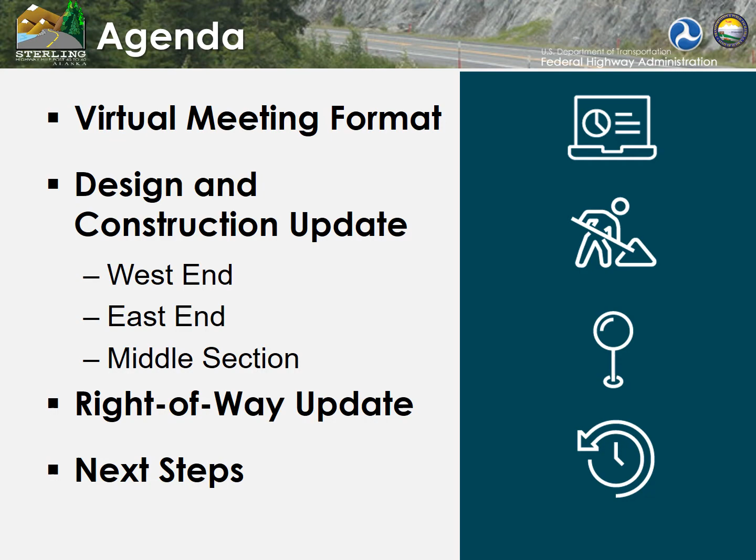We're using a virtual meeting format, which consists of an online open house supplemented with several different ways that you can get in touch with us. I'm also going to cover a construction and design update on the different segments of the process.

For this outreach opportunity, we are hosting a virtual online open house from October 22nd to November 5th. So if you are watching this presentation on our website, you have found it. There are a few other opportunities to interact with the project team that you might want to consider.

On Tuesday, October 27th, from 4:30 to 6:30, we'll be hosting a live online chat. During that time, you can visit our project website, and there will be a chat bubble that will pop up on the right hand of the screen, and you can chat online with members from the project team. We'll have representatives from all the different areas of expertise on the project to answer your questions in real time.

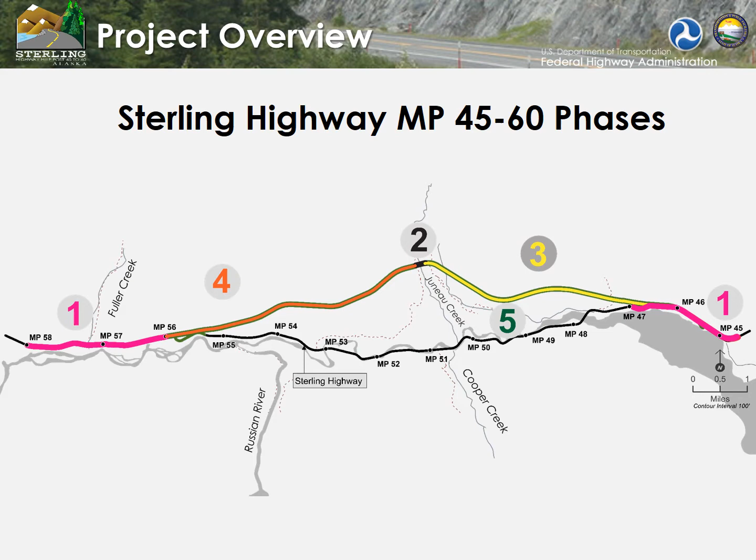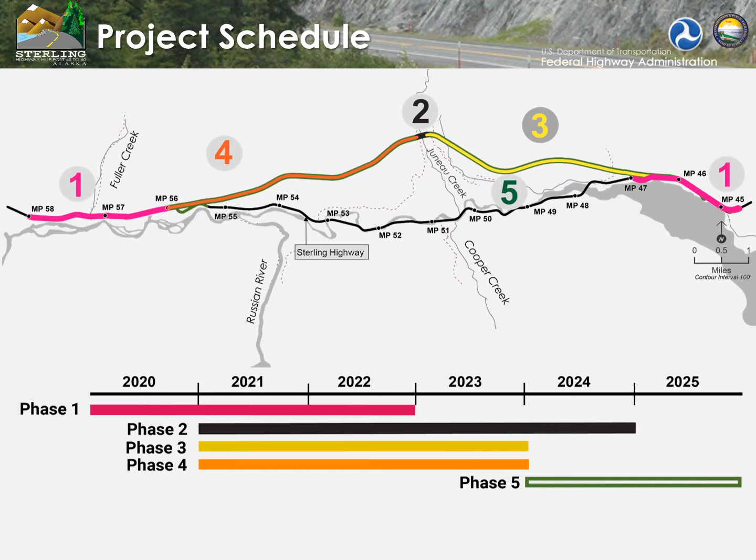Next year, construction will start on phase 2, the bridge. That construction is estimated to last 4 seasons. It is the most complex portion of this project. The east alignment and west alignment, phases 3 and 4, will continue construction next summer, and the final completion will happen by 2025. We still have a goal of being open to traffic by the end of 2025.

This segment of the presentation covers design and construction updates. If you're looking for an overview of the entire project, you can view the video on the online open house homepage. What I'm going to cover today is really highlights of new items and minor changes. If you'd like an in-depth overview of what's planned for the east and west ends, please take a look at our presentation from February 2020, which is also archived on our project website.

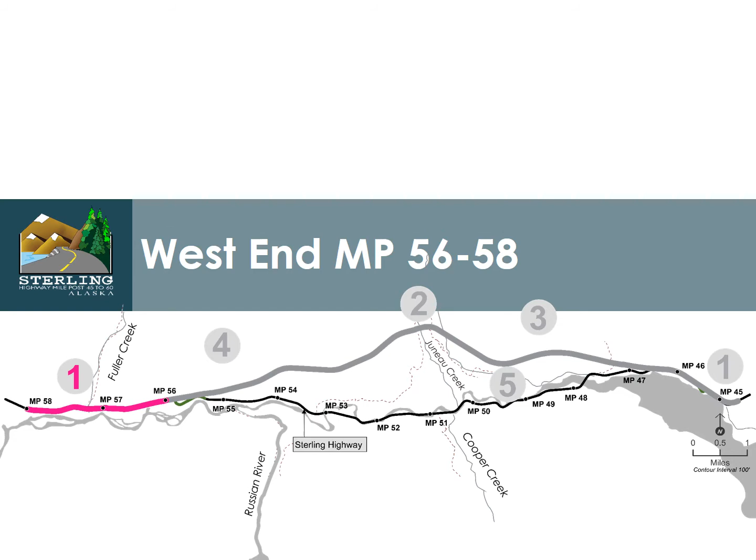The west end, again, is milepost 56 to 58. Final plans were submitted to the DOT for this segment in August 2020. There were no major changes from the design that we shared with you in February. A few minor changes were made to better protect wetlands and waterways. One of these is a retaining wall that was added here in the green to keep the highway out of high quality wetlands. We were also able to remove some sheet pile walls in the Kenai River that were planned and better accommodate Fuller Creek in the design.

We are planning to put this segment out to bid for contractors in February of 2021. There will also be a separate package for erosion control around milepost 57 that will go out to bid on that same time frame, February 2021.

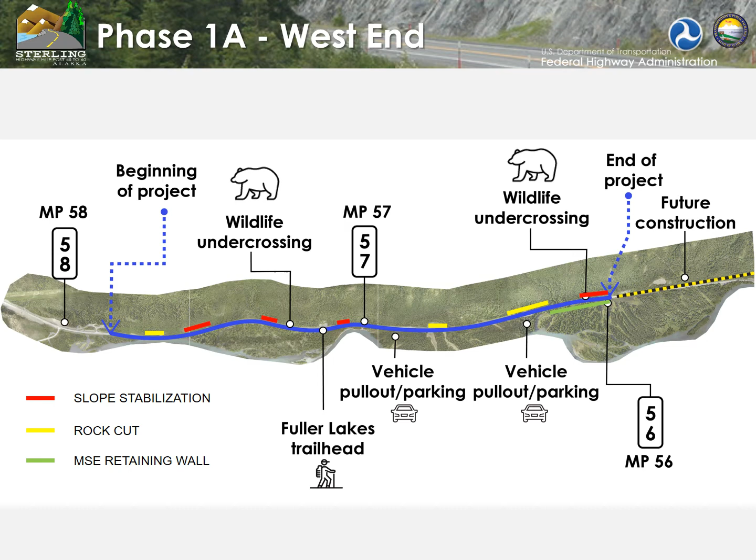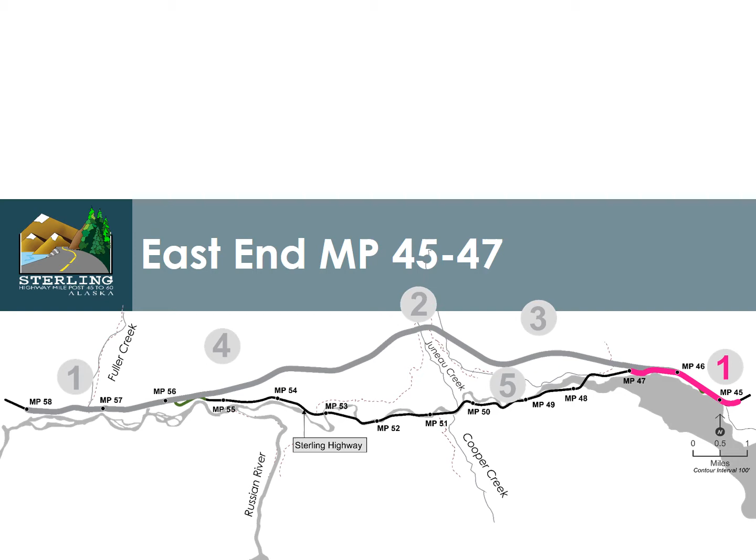Now let's talk about the east end, which is milepost 45 to 47. Utility coordination and right-of-way work has been progressing in this segment. We have gotten a lot of public feedback on what the highway will look like near Quartz Creek Road. So just wanted to acknowledge that we have received all those comments. However, the design on this phase has slowed down a little bit to allow the design of the connecting section, which will be part of phase 3, to catch up.

The engineers are working on the next design iteration from milepost 45 to 47, and we expect that that will be ready at the end of the year. We will be sharing that with the public when it's available and with the property owners in the area.

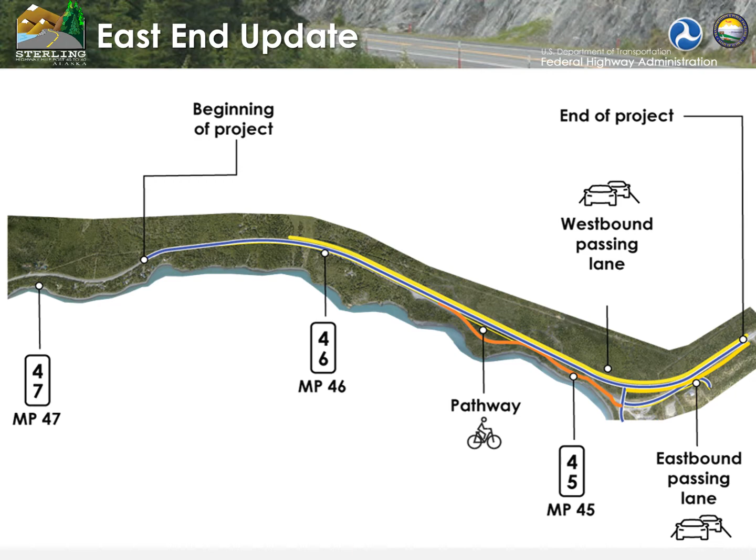All right, let's talk about the middle section, or the off alignment portion of the project. Design has been moving ahead and construction has started with preliminary clearing. So just to remind you again, phase 2 is bridge construction, 3 and 4 is road construction, and then 5 is paving, signing, and striping.

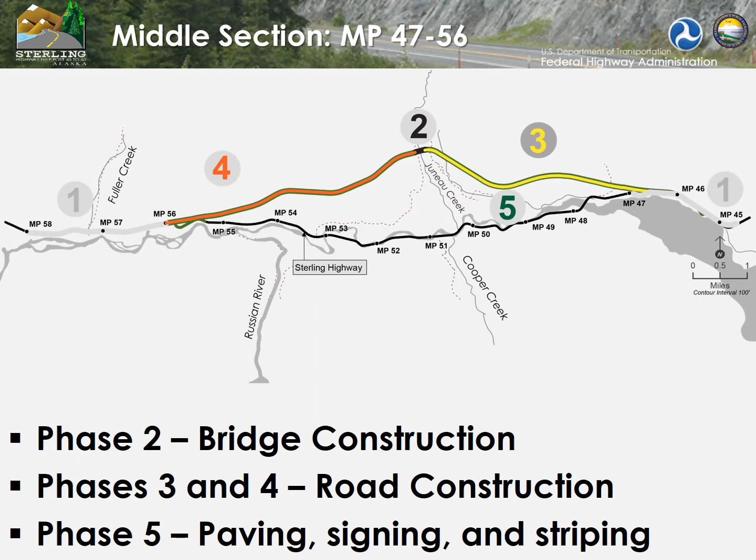I'm sure that you noticed that clearing happened this summer. The contractor cleared a 200-foot wide area to allow access to Juneau Creek Canyon. That allows us to get the geotechnical drillers up there to gather more information for the bridge design, and it will also enable construction starting on the bridge next year. Firewood was made available to the public at several locations, and we will continue to update you if and when more public firewood is available.

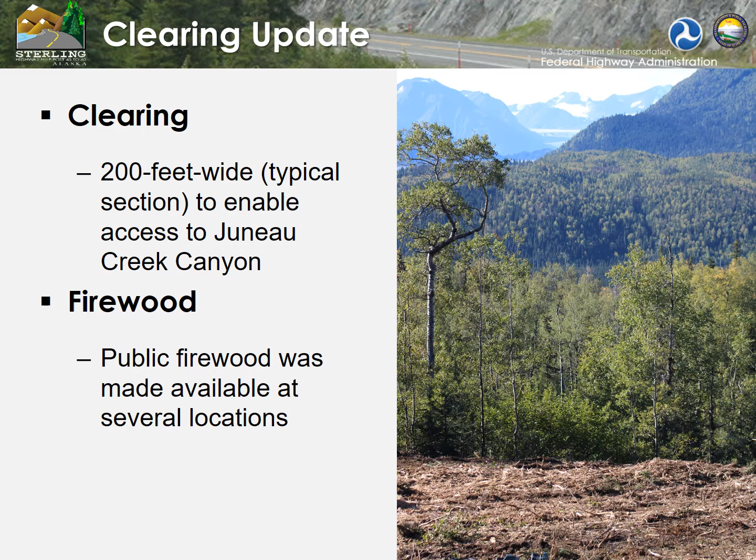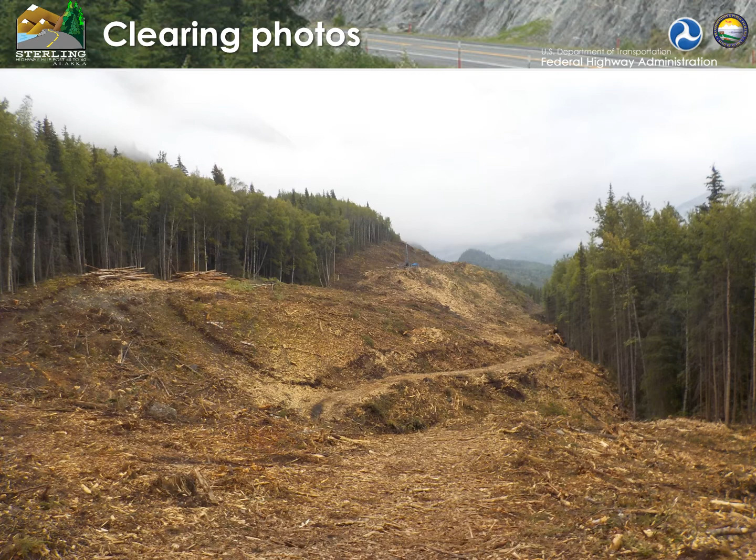This slide shows a photo of the alignment, the off alignment portion that was cleared this summer. The following photos show some other images as well of what the alignment looked like after the trees were cleared.

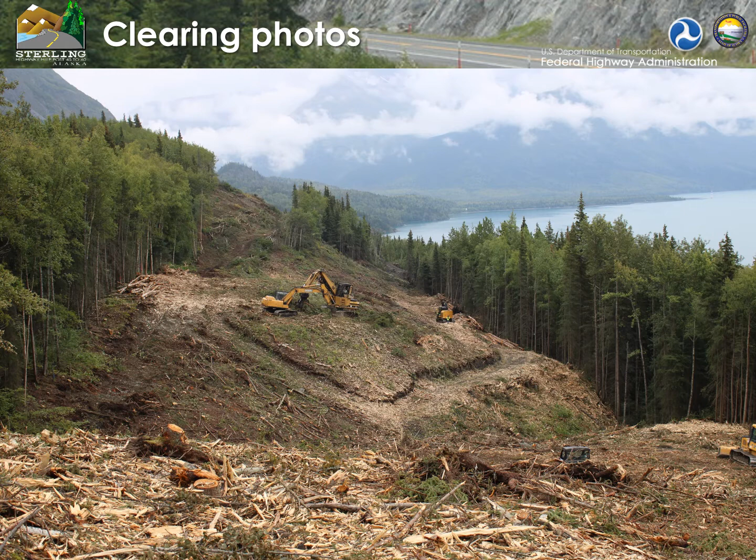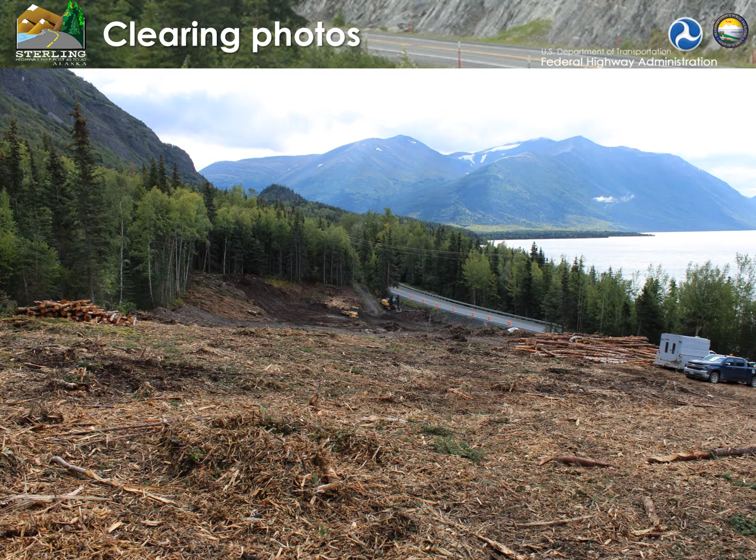This photo shows one of the geotech drilling rigs that we were able to get onto the alignment to do some investigation of the subsurface.

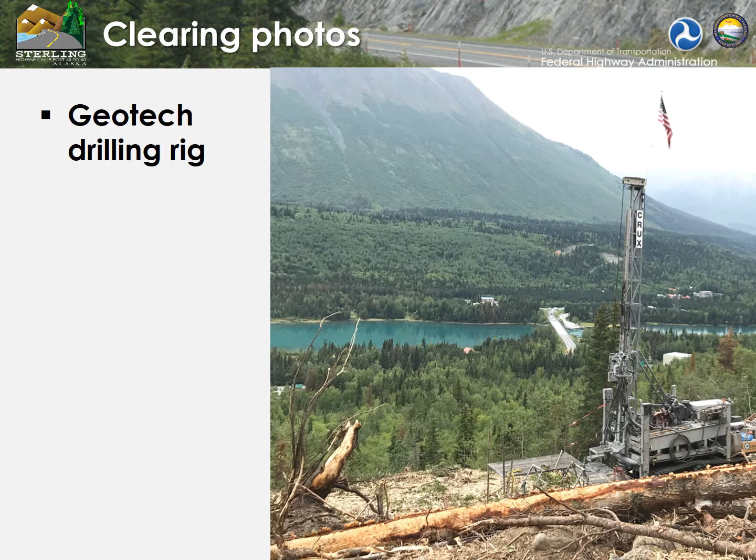This is another geotechnical crew out doing some drilling. Thank you very much for your patience this summer during construction.

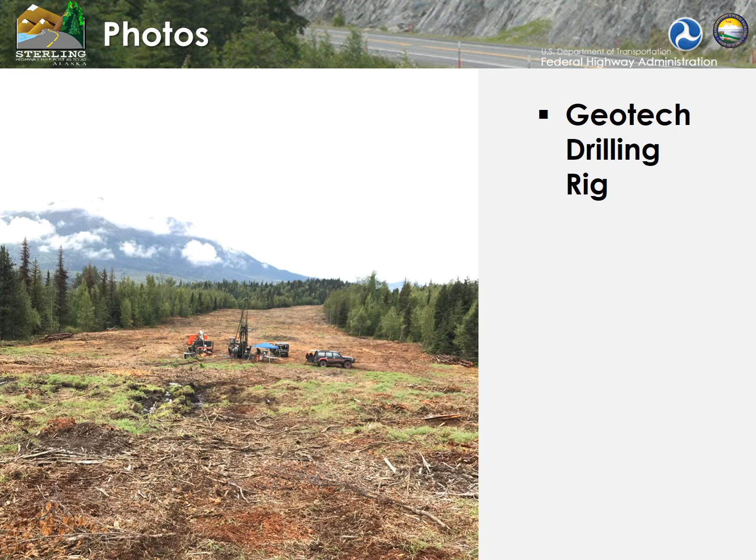We also have been progressing the design. So the following slides are going to show you some of the changes that have been made during design. One of them has been some minor alignment refinements along the new portion of highway.

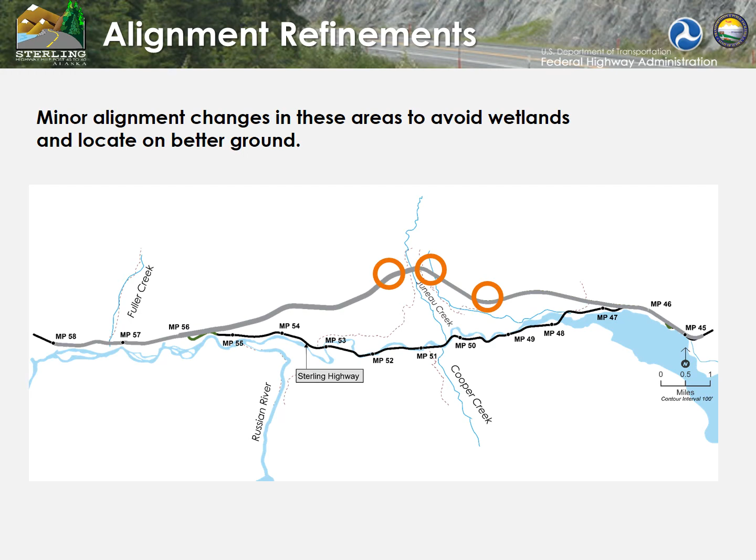We were able to move the alignment slightly to the north, both to the west and the east of the Juneau Creek bridges, in order to get out of some wetlands. To the east, near Jerome Court, we were able to move the alignment slightly to the north to get onto some better ground for construction, which also has the added benefit of moving the highway a little bit further away from that residential area.

Our engineering team also began work on the Juneau Creek Bridge. The bridge is being designed by DOT's statewide division, and they are looking at several different concepts for what the bridge might look like. This shows one of those concepts, which is an arch concept.

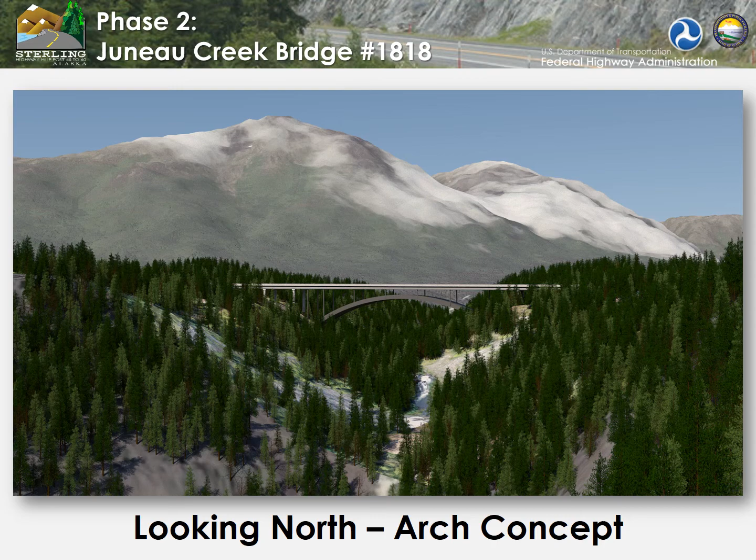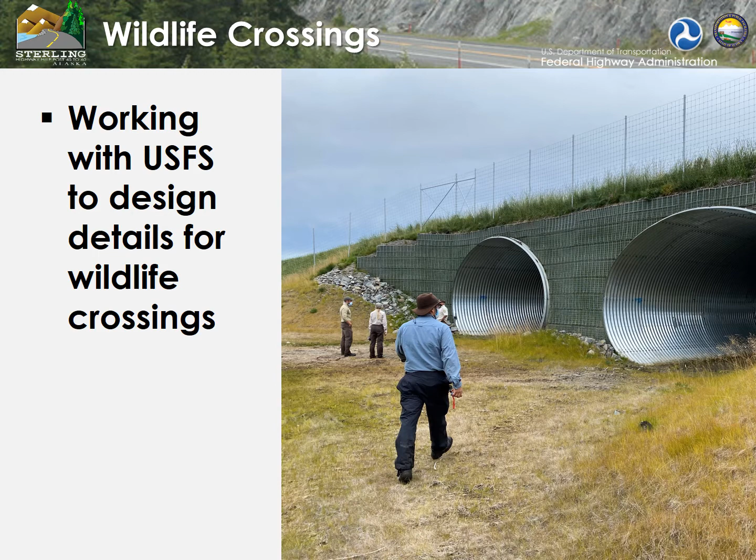We also have been working with the U.S. Forest Service to design the details for the wildlife crossings and refine the locations for the wildlife crossings. The picture you see here is from a site visit taken with the project team and some agency participants visiting some recently constructed wildlife crossings to the west of the project area.

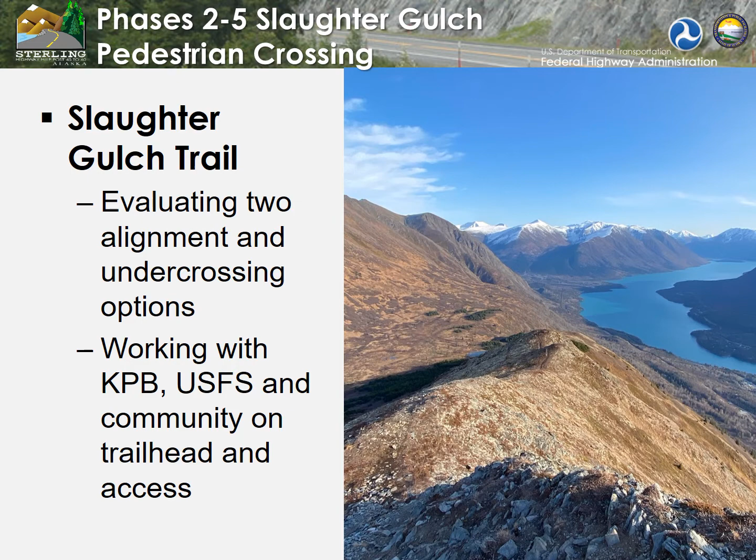In the Slaughter Gulch Trail area, we've been evaluating two alignment and undercrossing options. We're currently working with the Kenai Peninsula Borough, the U.S. Forest Service, and the community on the trailhead design and access design.

Briefly, we have heard quite a number of questions about water rights. We have heard your concerns about water supply and about water quality. We've also heard about wetlands north of Langille Road where some small drainages originate, and we are aware that this is filtered as a primary or secondary source.

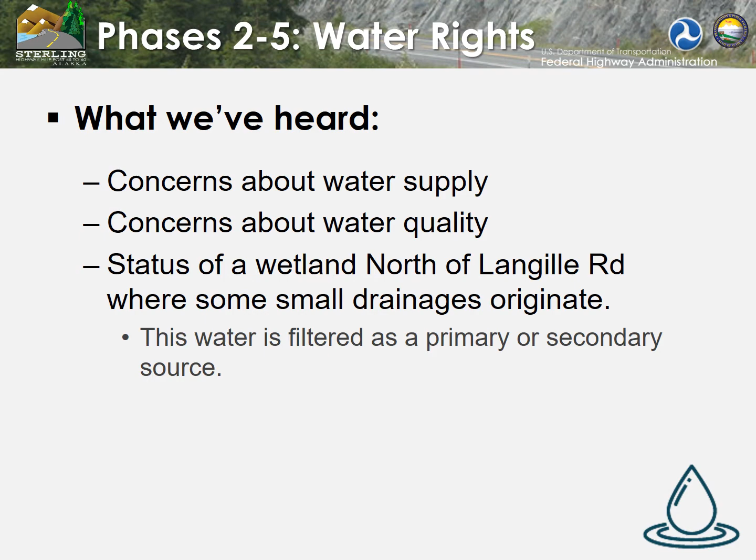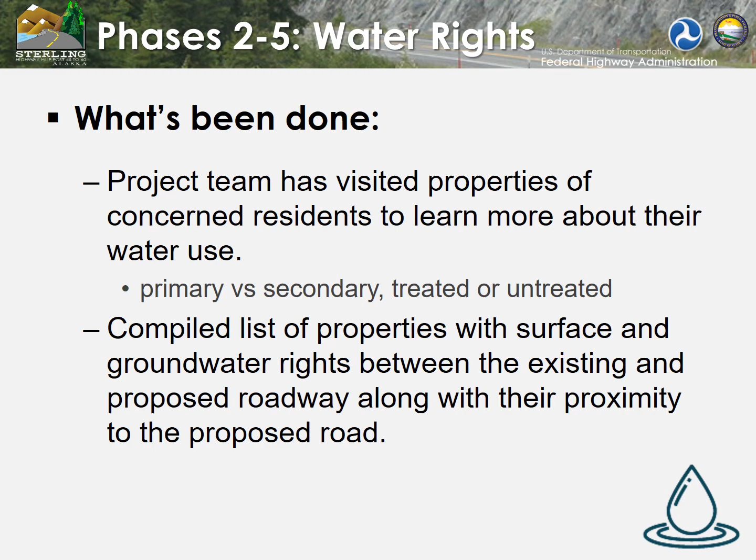So the team has been reaching out to those property owners to learn more about their water use and if they're treating it or if it's untreated. We are also researching a list of properties with surface and groundwater rights, along with their proximity to the proposed roads.

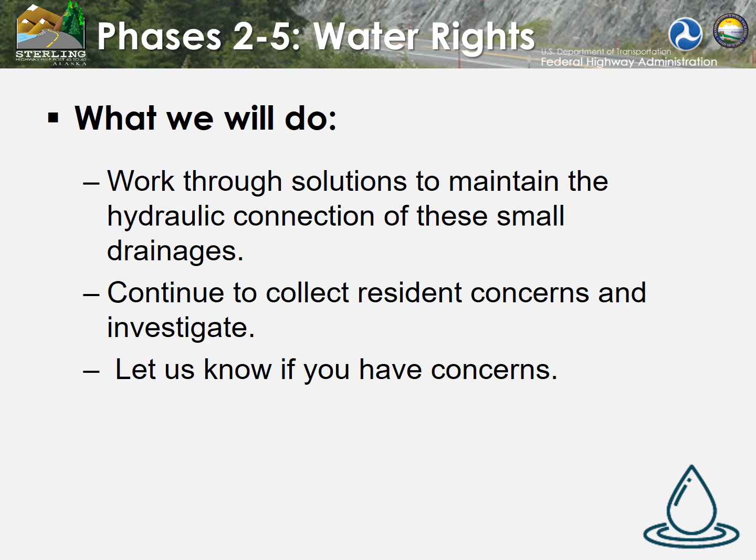We are going to work through solutions to maintain the hydraulic connection of these small drainages. We'll continue to collect your concerns and investigate solutions for each property. So let us know if you haven't reached out to us already, and we're happy to work with you.

Right-of-way is in progress for Phase 1 properties. We are anticipating starting right-of-way acquisitions on Phase 3 to 5 affected properties in 2021.

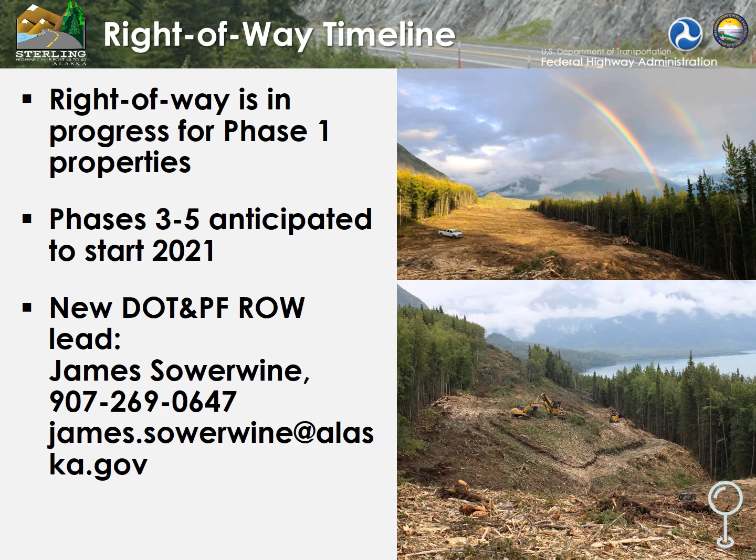All right, that's the update on what's new. What is coming next?

Well, construction work is still underway and field work as well for this year. Clearing will continue through early fall. Public firewood is still available on Langille Road.

The geotechnical efforts will continue into November and December as long as weather allows, and then will go on hold until spring. The cultural resources surveys that we did this summer and fall are complete, and we are coordinating with the agencies on our findings.

The hydrology field work that we did this summer is done, and the wildlife camera capture study will continue through the winter to bring us better data on where animals are using the landscape near the project.

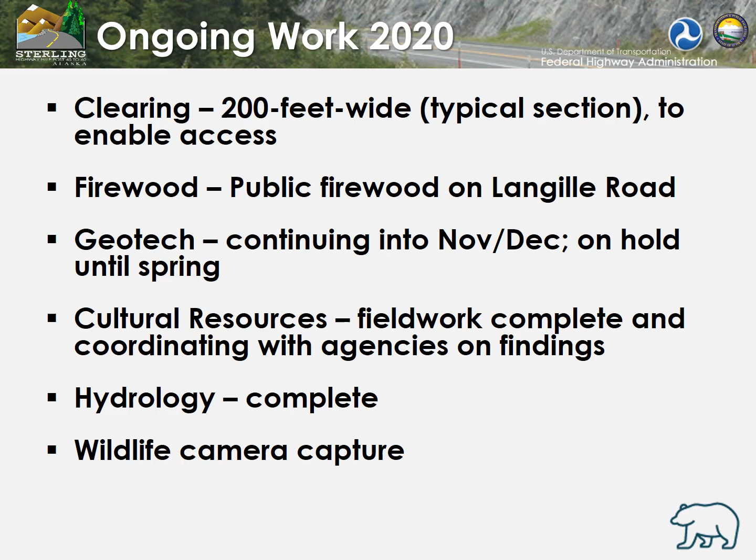Let's talk about what's coming next. The right-of-way process will begin with agency landowners, including Kenai Peninsula Borough, DNR, and U.S. Forest Service. The West End, Phase 1A, is anticipated to go out to bid in spring of 2021 and begin construction. The East End, Phase 1B, is slotted for 2022 or 2023 construction.

The bridge, Phase 2, will begin construction next summer, specifically foundation work. And then Phases 3 and 4, the off-alignment portions, we are anticipating doing grading and drainage work and also beginning construction of the Pioneer Road.

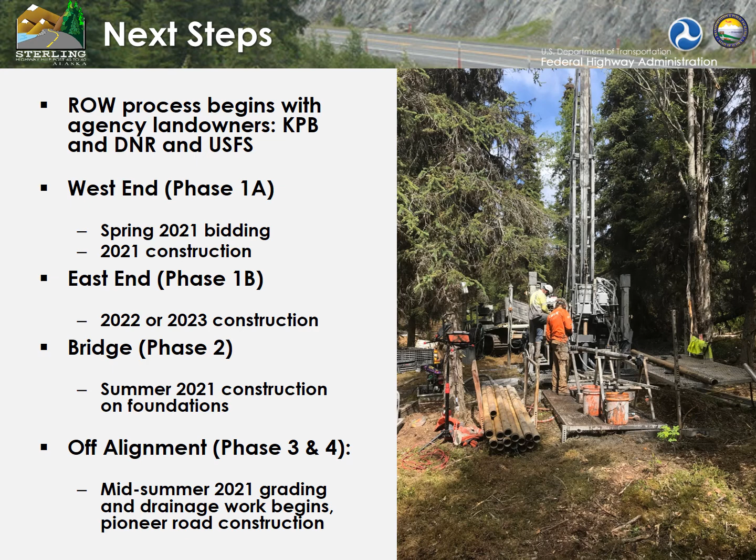We are planning our next public outreach event in January or February of next year. It will likely be on a similar format, so stay tuned for more details. Please provide me feedback on how you felt these methods worked for you. I am always looking for new ideas on how we can better stay in touch with you, especially during these challenging times.